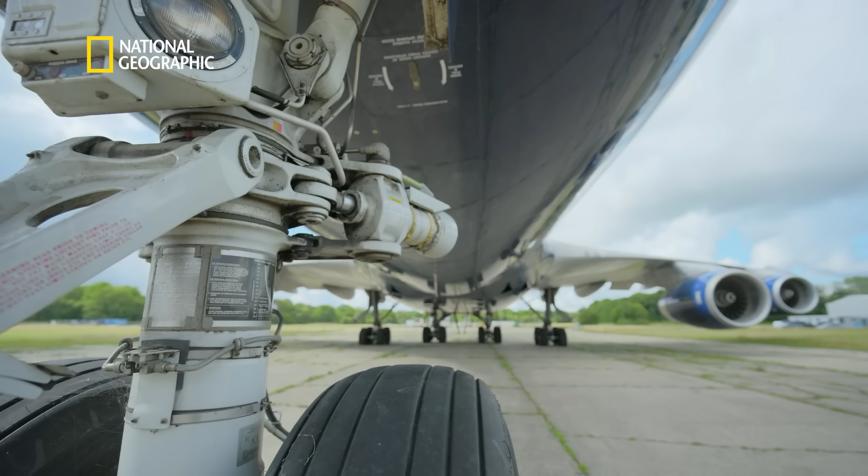With an unprecedented 735,000-pound takeoff weight, the 747 requires a huge increase in engine power and range for long-haul flying.

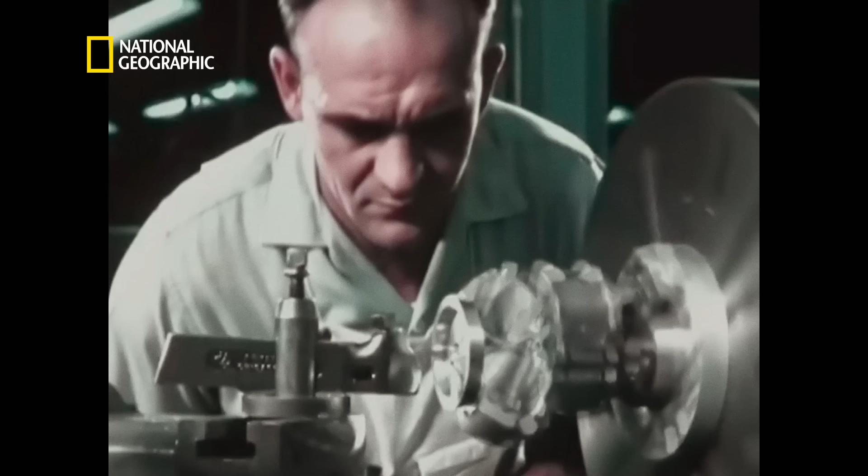So Boeing team up with Pratt & Whitney, innovators in the field of aviation propulsion, who are working on an experimental new engine design that promises to revolutionize commercial air travel: the turbofan.

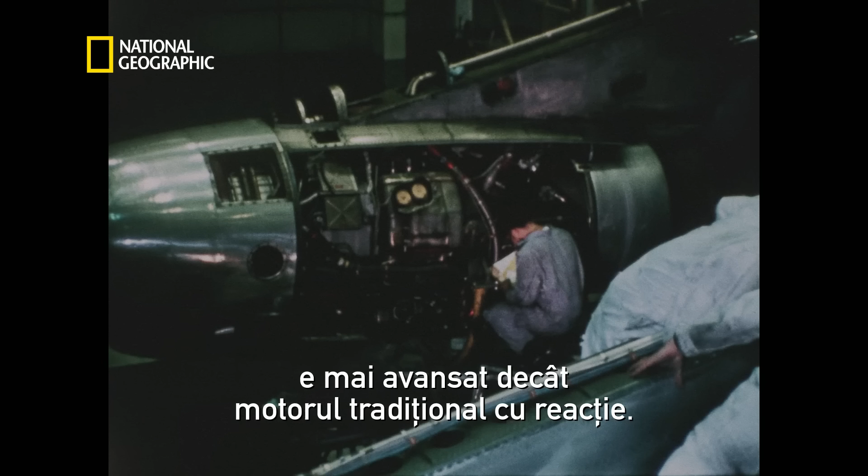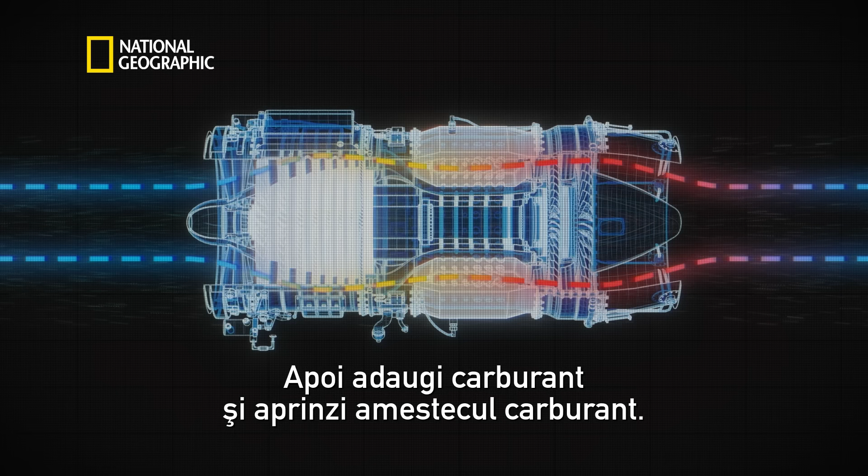The turbofan engine is an advancement of the more traditional jet engine. The original jet engines from World War II, developed in England and Germany, were called turbojet engines. They have basic components: there's a portion with fans that compress the air, then you add fuel and combust the fuel-air combination. You then have turbines that extract some energy from that combustion to run the compressor blades, and then some kind of exhaust to create the thrust.

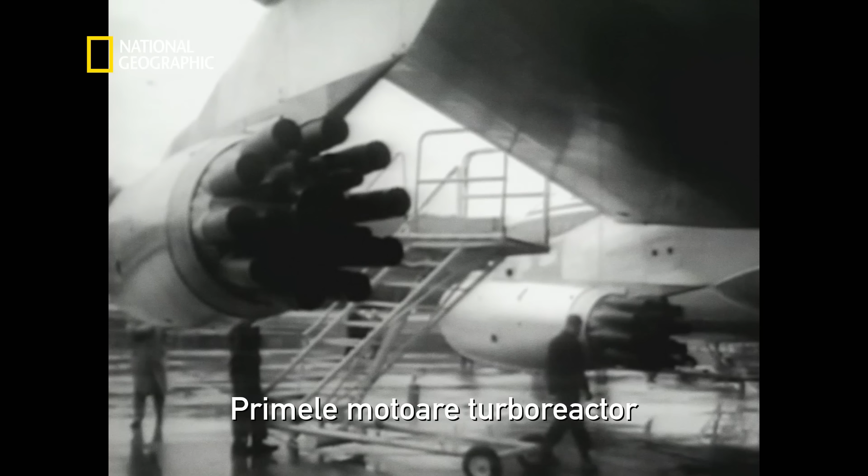So conceptually, it's very simple, but then it's limited to how much thrust you can get depending on the size of the aircraft. The first turbojet engines on the Boeing 707 produce 11,000 pounds of thrust, whereas the 747 is going to need almost 4 times that amount.

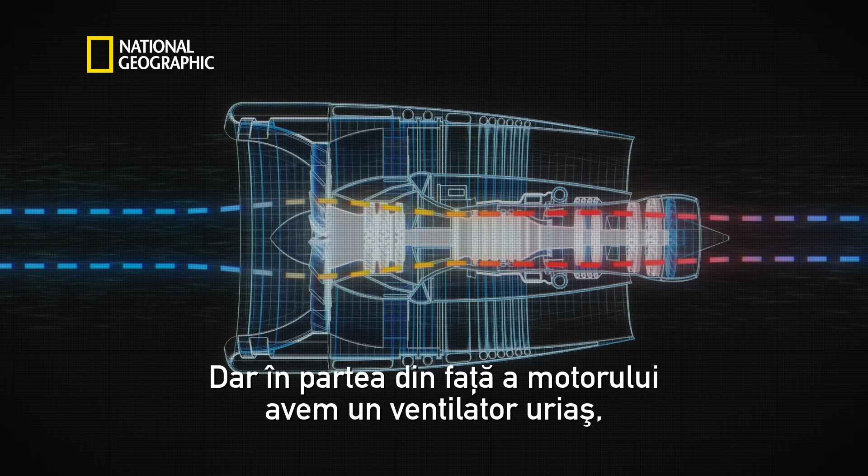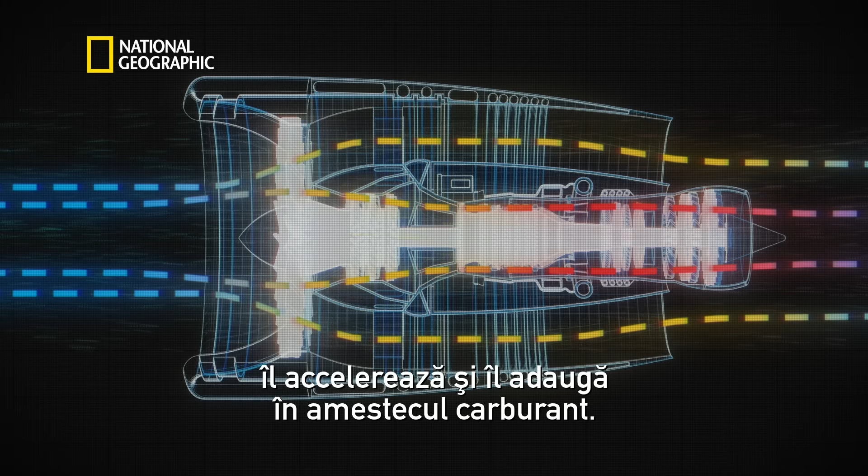So the idea with a turbofan is to increase power without increasing fuel consumption. In the middle of the engine, you still have the classic jet engine—compressors, turbines, combustion chamber—but at the front of the engine, you now have this massive fan. That fan is sucking in even more air. The genius behind the turbofan is it's taking air that's not being heated up, it's just speeding it up. So as the engine's spinning in the middle, this big fan at the beginning is not just feeding the engine, it's taking more air and compressing it, speeding it up, and putting it around the outside of the jet flow.

The addition of the gigantic fan means air is sucked in at a rate of 885 feet per second. So it's the sheer speed that the air is traveling through that generates extra thrust without the need for a bigger engine.

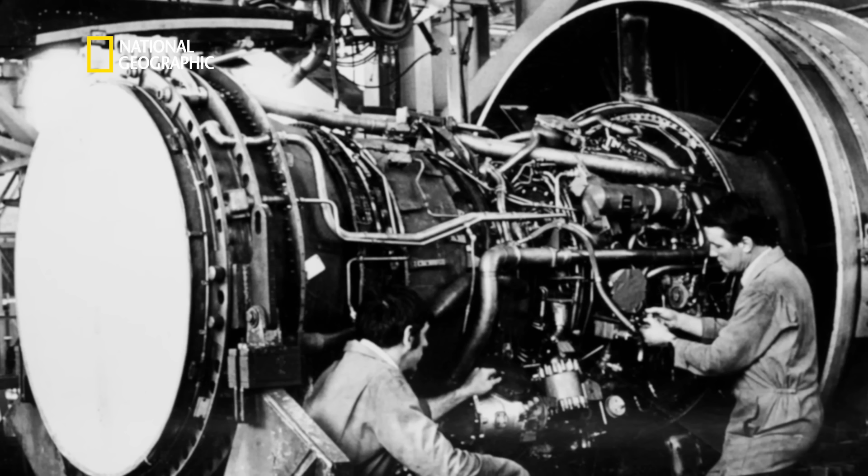But in 1968, this new engine design is in its infancy and has never been tested on a commercial aircraft. Pratt & Whitney are designing a whole new type of engine for this—a turbofan engine called the JT9D—and they are having an absolute nightmare getting this engine to work. It's one thing to invent the technology, it's another thing entirely to make it reliable enough to use in a civil aviation setting. There are a huge amount of glitches to overcome.

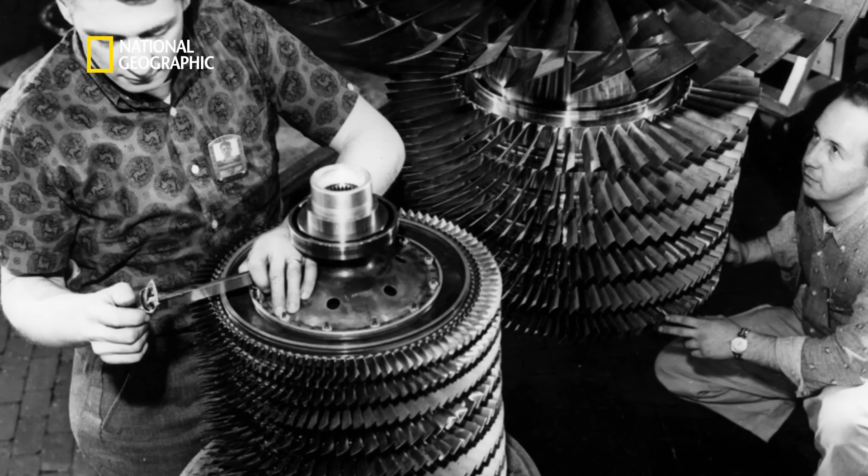Little things like distortion on the casings, blade failures, the compressors not doing what they were supposed to—that hurdle for them to overcome was massive. But time is running out for fixes, and the pressure is mounting on Boeing. They have to push forward with the test flights and start recouping their considerable costs. So what they have to do is cross their fingers, slap the engines they've got on, and hope that nothing bad happens. Again, all of this is being driven by the fact that they need to start recouping money as soon as possible, because they're literally living on the edge now, Boeing.

On the 9th of February, 1969, the 747 made its first flight. It was taken up by Jack Waddell, the test pilot, and it was being watched by a large group of people. So it was important that it went well, and actually, it didn't go well.

In front of the world's press, Waddell taxis the untested jumbo jet out onto the runway for its maiden flight and executes the perfect takeoff. But once out of sight, there's a problem. As he's flying, something's going wrong. He can feel it in the controls. One of the flaps is loose, it's broken. The plane is in danger, and it's not just the test pilot danger he's used to. His employers, his customers, all of them could lose faith in this new plane all at once. So they have to bring the aircraft back very quickly to make sure there's no lasting damage to the one 747 in the world that everything is resting on.

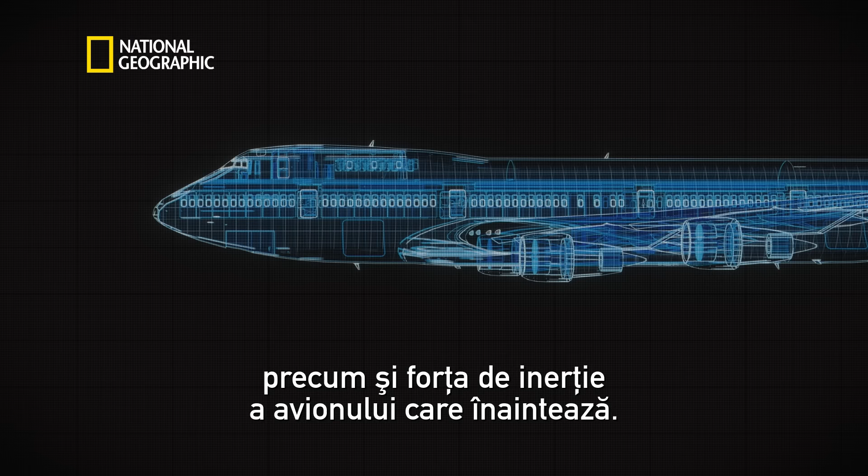Aircraft wings are deliberately designed to flex so they can absorb energy caused by air turbulence. But that flexibility can also lead to other issues. Flutter is when you have these aerodynamic forces on your wing, as well as the inertial force of the aircraft going forward. When the air flowing over the wing makes it bend excessively, the resulting change in airflow pushes the wing back in the opposite direction, creating a feedback loop that leads to vibrations, known as flutter. This motion can continue to grow to dangerous levels. In really extreme cases, as flutter causes the wing to wave, the whole wing can completely break off. With the 747's wingspan of over 195 feet, any amount of torsion can quickly be amplified.

To spot the problem and fix it, the aircraft must be pushed to its absolute limits, and only a select few are up to the task.